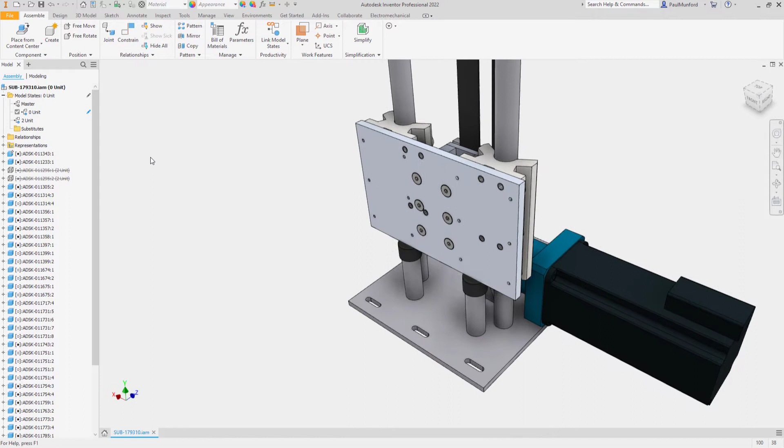In this example, we see a new model state being created. The new model state records the suppression state of components and remembers the model state settings of subcomponents. Multiple families or variations of a design can quickly be created using a spreadsheet.

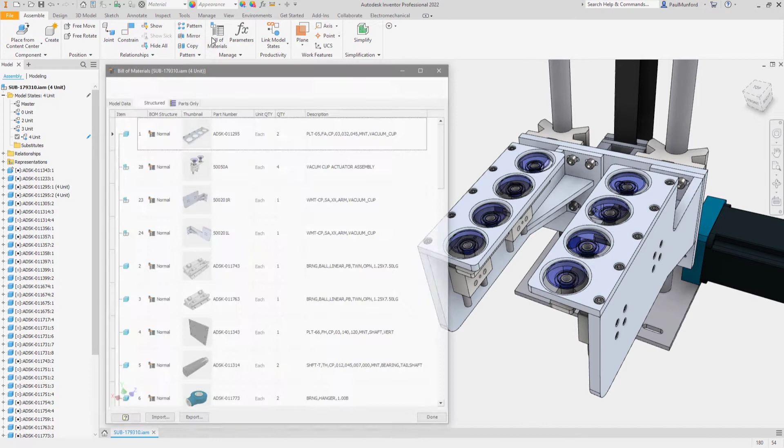Each model state captures unique part properties and quantities to track the number of items required in your bill of material and parts list. In addition, new instance properties can be allocated to individual components, allowing each instance of a component to be tagged with information that's unique to that component.

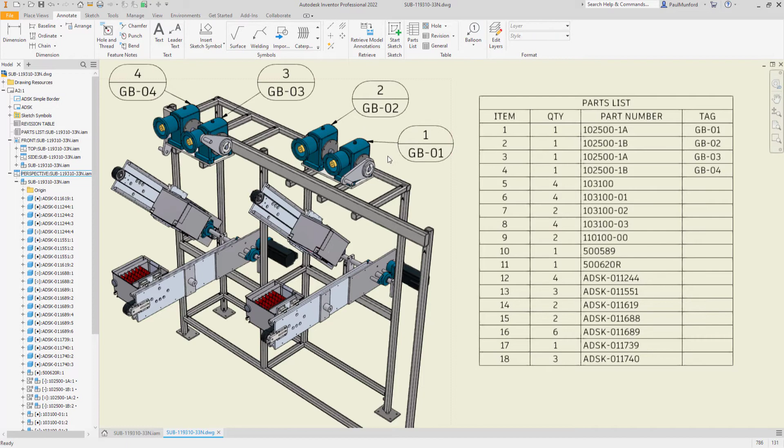Instance properties could be used to identify the location, order of fit for your assembly, or to add unique service numbers to each component. We often need a simplified version of our designs for simulation, coordination, or to simply protect our intellectual property. In the past, we've used automation tools to help simplify designs retrospectively.

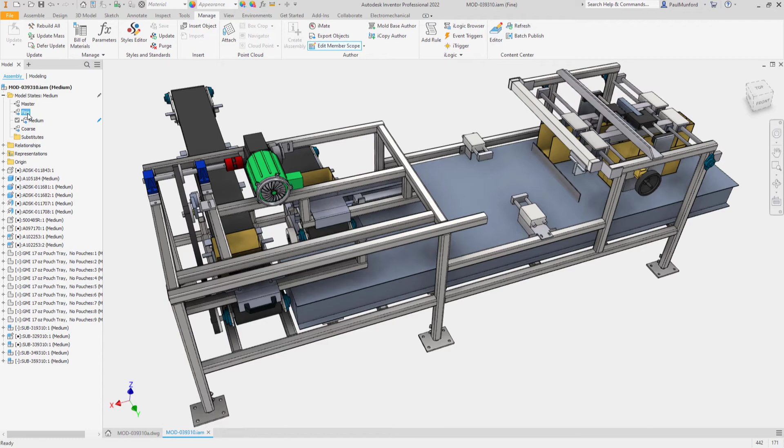Model states allow a new possibility of building components that have simplified representations built in from the start. Simplified representations can be automatically linked to assembly model states to provide a quick and easy way to simplify an entire design. Model states are fully supported by the Inventor API and iLogic to help you automate your design workflow.

Simplified models can be used to create drawings of large-scale assemblies where small detail may not be required. Autodesk Inventor 2022 provides you with new functionality to help you streamline your modeling and automation tasks with model states for assembly files.